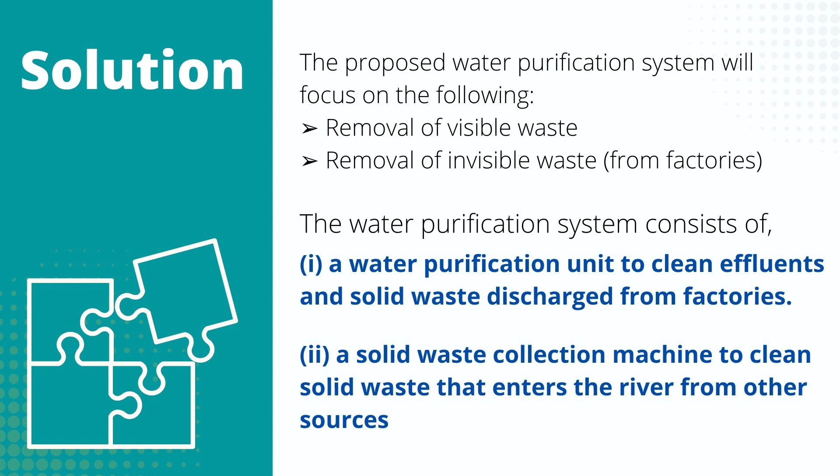The water purification system consists of a water purification unit to clean effluents and solid waste discharged from factories, and a solid waste collection machine to clean solid waste that enters the river from other sources. The water purification unit has 2 components, a solid waste capturing unit and a mycoremediation unit. It will be established across waterways that carry industrial waste into the river.

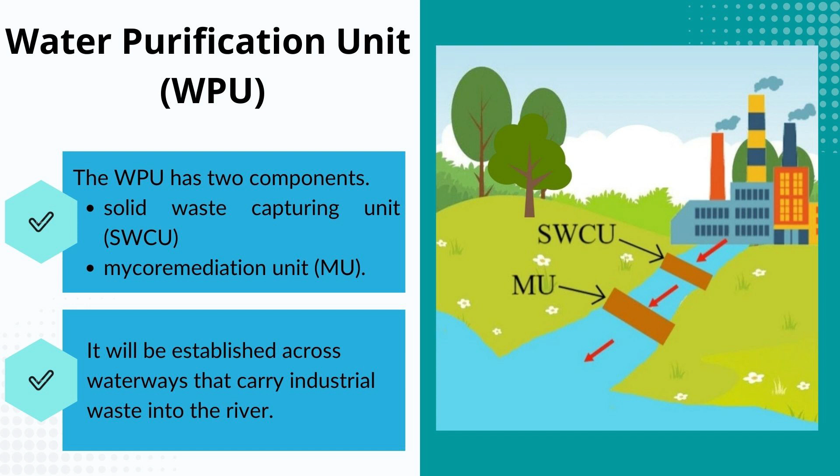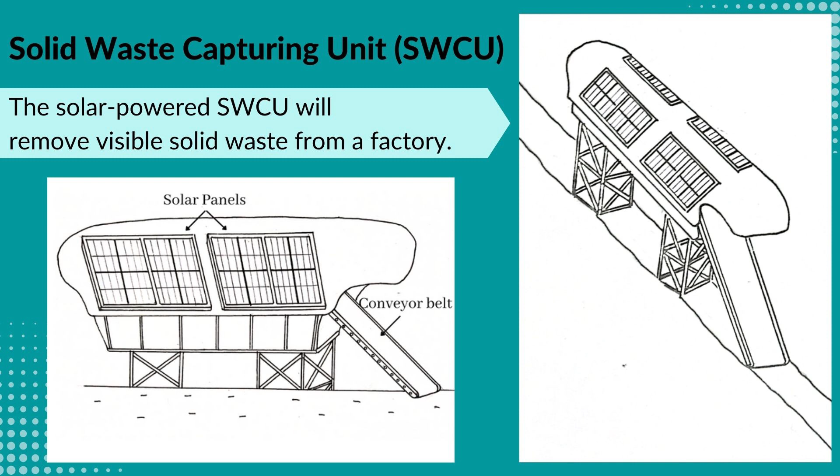The solid waste capturing unit will remove visible solid waste from a factory. It has a large dumpster, conveyor belts, and sensors. The conveyor belts and the sensors are solar powered. As you can see, wastewater will flow through the solid waste capturing unit. Then the conveyor belt extracts the debris from the water and will direct it to a large dumpster,

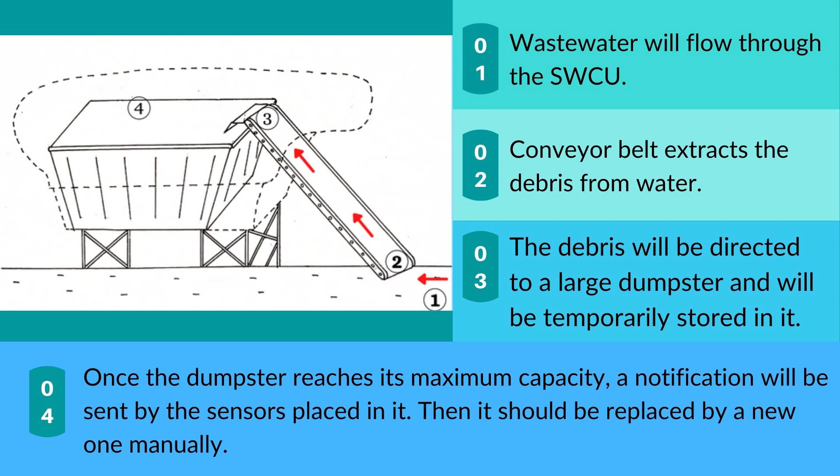where it will be temporarily stored. Once the dumpster reaches its maximum capacity, a notification will be sent by the sensors placed in it. Then it should be replaced by a new one manually. After removing the visible waste, water will flow through a mycoremediation unit, which is for invisible waste removal.

This unit contains white rot fungi spawn. Oyster mushrooms are used for the mycoremediation process. The mycoremediation unit will prevent heavy metals such as cadmium and arsenic, petrochemical pollutants, and harmful chemical compounds from flowing into the river.

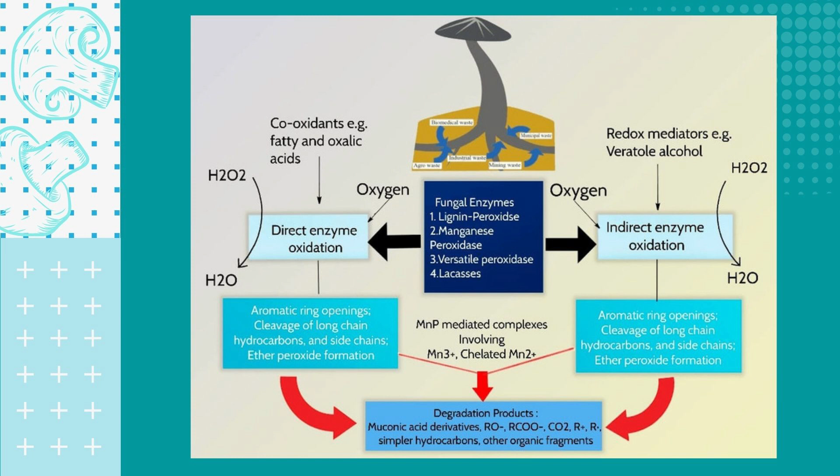This diagram shows the mycoremediation process. This is the solid waste collection machine that will be deployed in the river to collect solid waste from other sources. It has a conveyor belt that will extract the debris from the river. As in the solid waste capturing unit, debris will be directed into a large dumpster and will be temporarily stored. When the dumpster is full, the front door will be closed automatically.

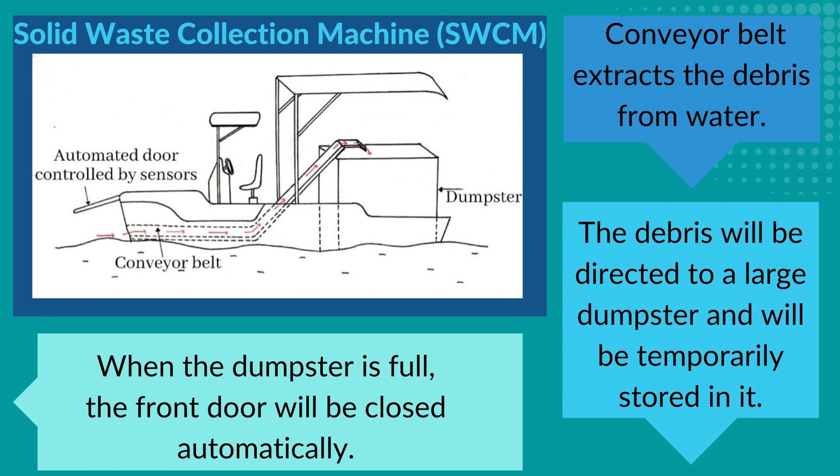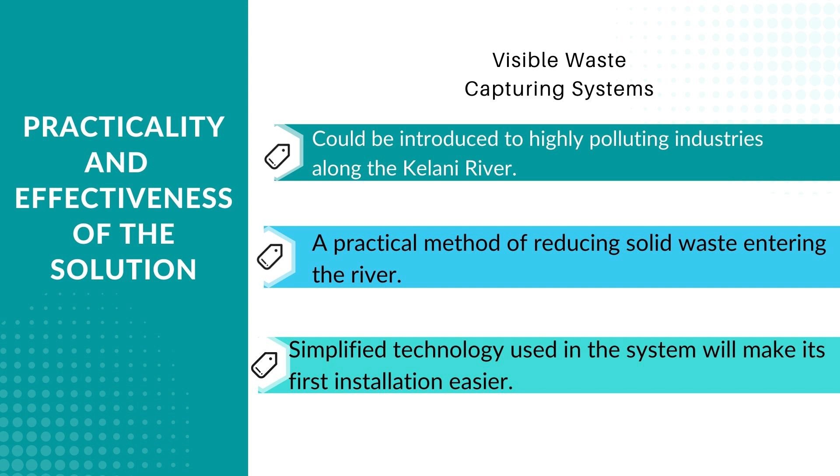Now let's see the practicality and effectiveness of the visible waste capturing systems, the solid waste capturing unit and the solid waste collection machine. The solid waste capturing unit can be introduced to high polluting industries. This is a practical method of reducing solid waste entering the river. Its initial installation is easier because of the simple technology used. The solid waste capturing unit is eco-friendly as it's powered by solar energy. A considerable amount of waste entering the river can be reduced by these units.

The solid waste collection machine can remove solid waste in a large area of the river efficiently. And these are good alternative systems which help reduce the large amounts of chemicals used for water purification and the increasing cost incurred to purify water.

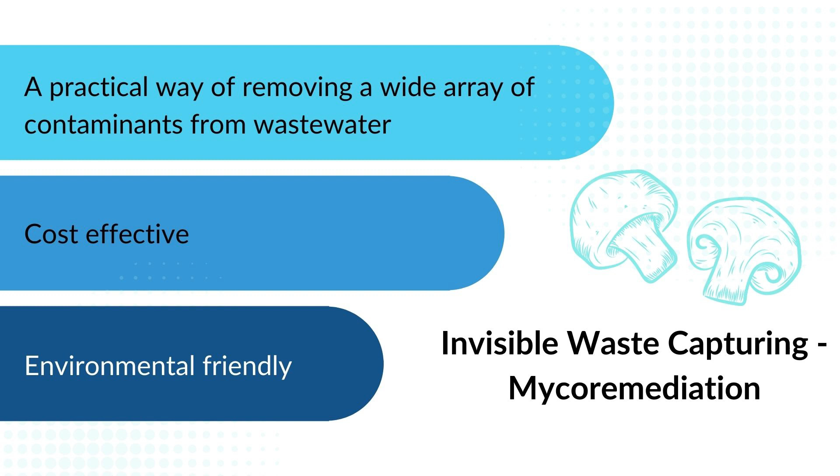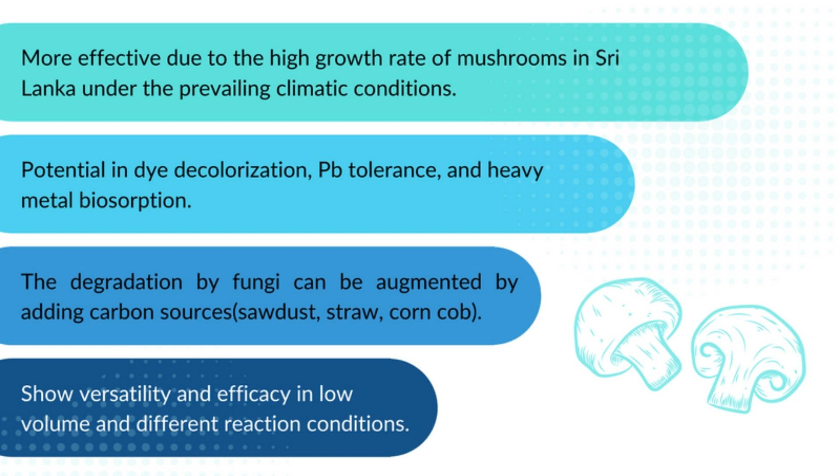Similarly, the invisible waste capturing mycoremediation unit is a practical way to remove a wide array of contaminants from wastewater. It is cost-effective and eco-friendly. Mushrooms are abundant as they grow well under the prevailing climatic conditions of Sri Lanka. It has the potential in dye decolorization, lead tolerance, and biosorption. Also, the chemical and metal degradation by fungi can be increased by using carbon sources like sawdust and straw. It also shows versatility and efficacy in low volume and different reaction conditions.

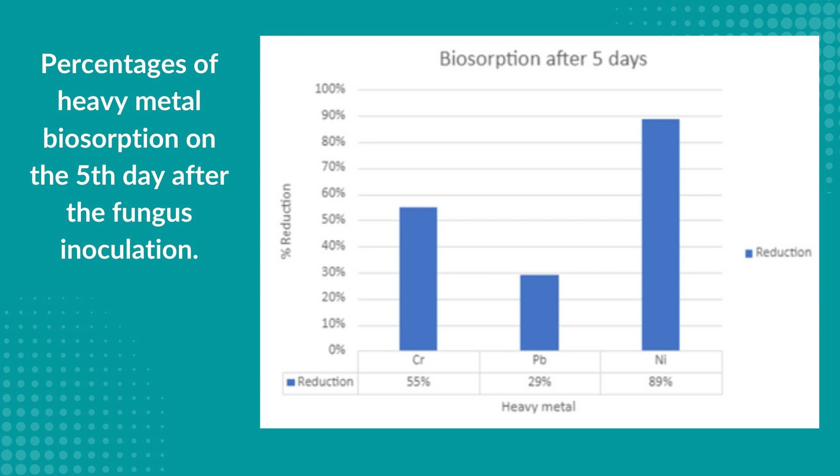An Indian study showed that the fungal biomass can absorb a significant amount of chromium, lead, and nickel metals after 5 days of it being grown in these metal concentrations. According to records, the cost of chemicals used to purify the water of the Kelani River has increased from Rs 879 million in 2015 to Rs 929 million in 2017.

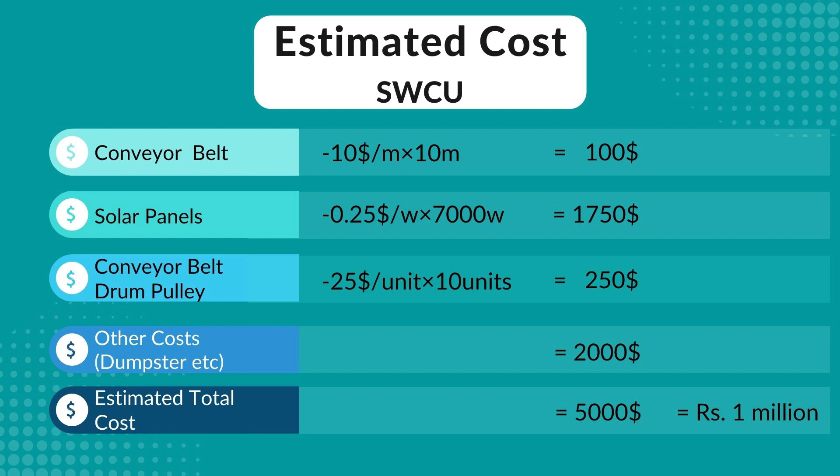It is best for the environment, health, and the economy if the entry of pollutants to the river can be prevented. The estimated cost for the solid waste capturing unit is approximately Rs 1 million. The estimated cost for the solid waste collection machine is Rs 1.2 million. Mycoremediation units are not expensive as mushroom spawns can be easily found from mushroom farms.

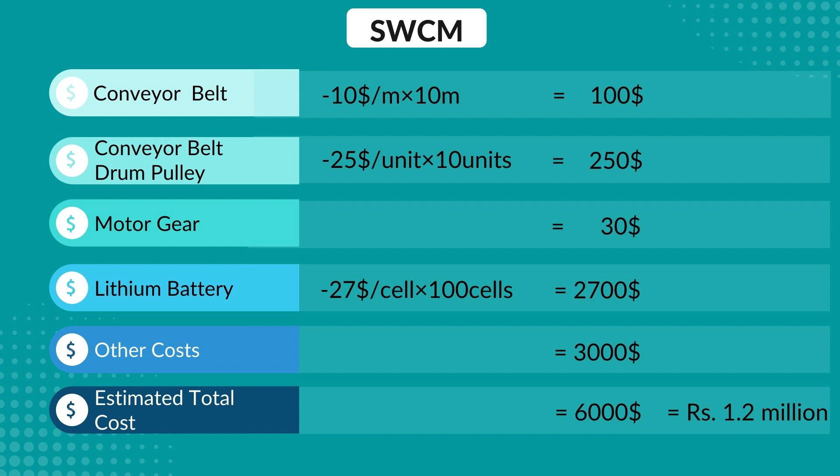As for the advantages of the visible waste capturing unit, the solid waste capturing unit and the solid waste collection machine are easy to use, efficient and eco-friendly. The possible disadvantages are that the solid waste capturing unit may be less efficient on gloomy days because it is powered by solar energy. The solid waste collection machine is driven manually and requires labor that will not be available throughout the day and the week. It is also powered by fuel and the initial cost is relatively high.

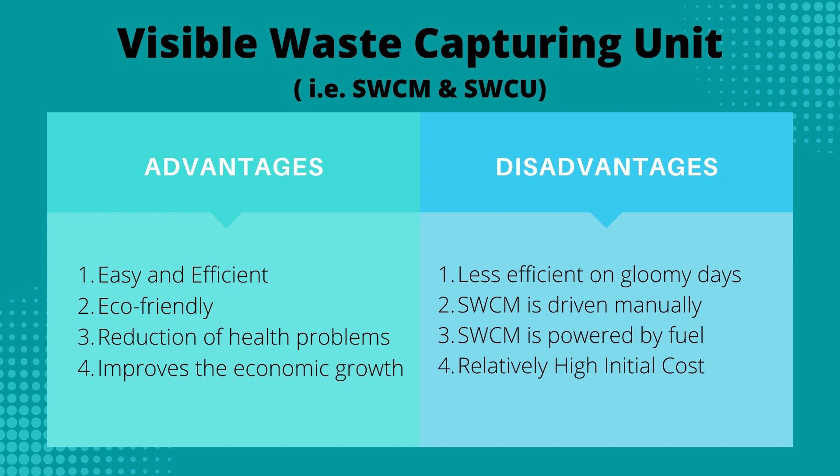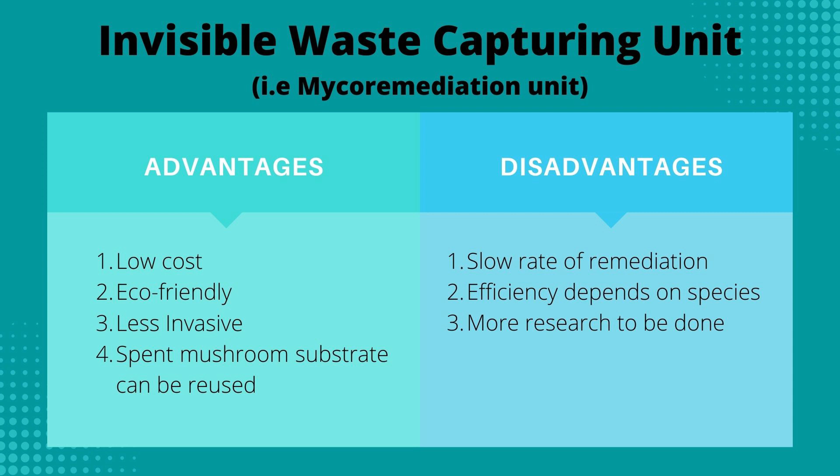The mycoremediation procedure will be beneficial because it's cheap, less invasive, naturally occurring, non-toxic, requires low maintenance, recyclable, profitable, not labor-intensive, and secure. In mycoremediation, the slow rate of remediation will be a limitation of the invisible waste removal process, because it may require several weeks for the degradation. The rates of uptake of contaminants may also vary across species. Further research is needed to prove its safety for other users as mentioned.

Arresting water pollution of the Kelani River can no longer be postponed. We believe that the proposed water purification system is a timely solution.